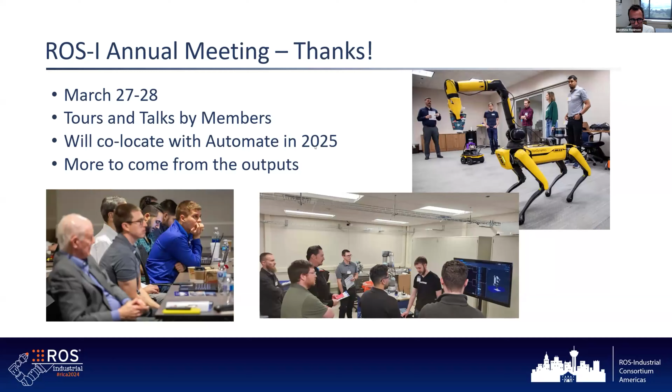As far as training and education, the big thing I wanted to highlight is we have a training event July 16th to 18th in Wichita, Kansas. This is hosted by ROS-Industrial member Spirit Aerosystems on the campus of Wichita State in collaboration with NIAR. We'll be focusing on motion planning optimization. There are still a few seats left, so if you're interested, check that training out.

Again, we allow full members to host a training event, and this helps us because then we can actually have these training events in other places besides San Antonio, which can be beneficial depending on where members are located. We're hoping to get something a little farther on the eastern side of the country in October, so stay tuned. We had some notional volunteers to host training, we're just going to iron out the details and that may come together. We'll announce it. Either way, October training, worst case, happens in San Antonio.

Fresh off the presses, I think last week we got notified that RIC Americas submitted a workshop on toolpath planning. This is largely leveraging the open source repository Noether, which has been picked up. On day zero, as they call it at ROSCON in Odense, they do workshop day. So stay tuned for this toolpath planning workshop, hosted, I think, by Michael Ripperger and someone who works with him. This follows from Michael's Reach workshop last year in New Orleans at ROSCON. We look forward to following up on that.

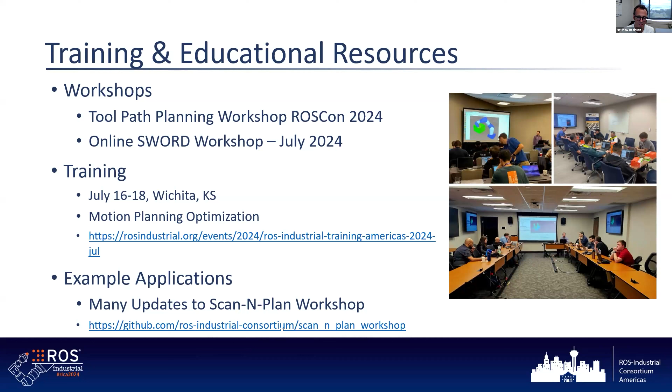And of course, Scan and Plan workshop, you'll hear a bit more about later. There's the GitHub repo, and there's been a lot of commits lately to that repository.

The big thing at a program level I wanted to share is that we've been feverishly working -- yeah, this video is going to be a little herky-jerky, we'll just pause that. Robotic Blending Milestone 5 concluded. We had a final demo on March 7th, a kind of program wrap-up at the end of March, and submitted final documents in April.

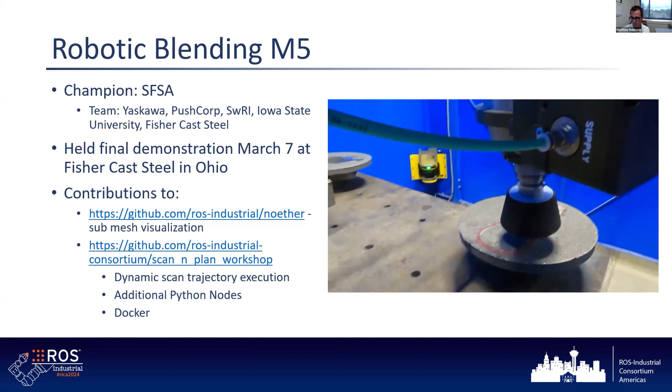But since then, there's been a lot of activity. There's been some commits and improvements to Noether, the toolpath planner that I mentioned previously, as well as Scan and Plan Workshop, which David will go into more detail about. The interesting thing about these collaboration projects is it brings together many different team members.

In this case, we had Yaskawa, PushCorp, ourselves, and of course Steel Founders' Society and their partner, Iowa State University, which they've been funding quite a bit of work with. It was really great to work with a university that has really good practical manufacturing chops, and then work with them to take what they developed and enable it to be leveraged in a modular robotics framework.

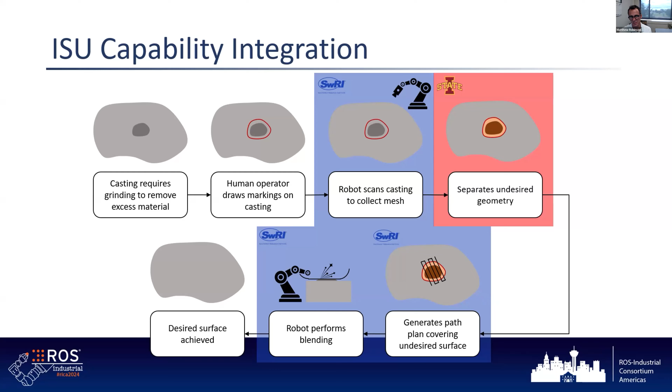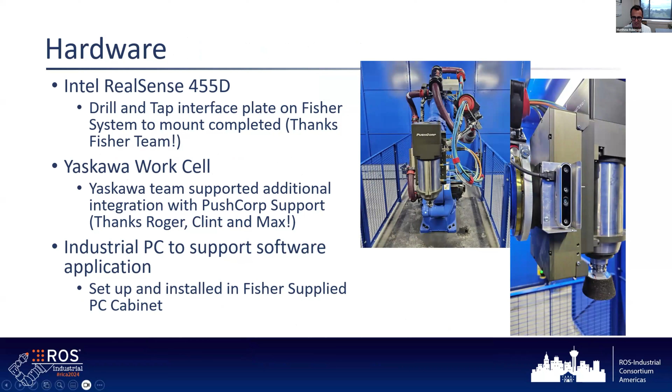In this particular application, it's leveraging the RealSense 455D. We haven't blown one up yet. You can see it's got some protection, but being a foundry, you might wonder — actually it's been going all right so far.

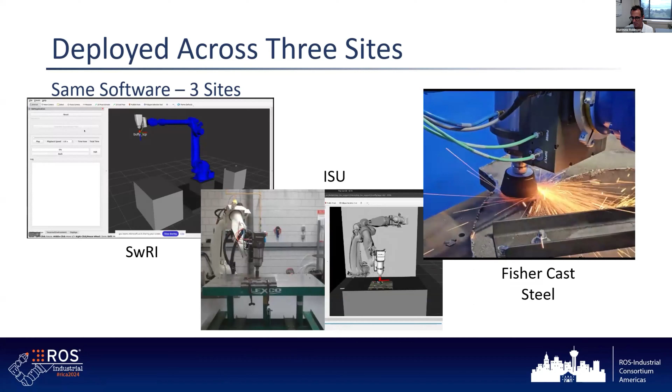And this is really useful, right? Because anyone makes commits, we basically have different hardware sets. Our PushCorp grinding system is a little bit different than what the other 2 sites have. Obviously, ISU is running a different color robot. And so it's really interesting to be able to kind of cross-test across the multiple sites. That's really interesting in these collaboration projects.

In this particular case, we stepped through, and David will probably touch on some of this. There's been a really neat update — the selecting regions, for instance, has been updated. Hopefully David will be able to touch on that, as well as some of this notion of submeshes.

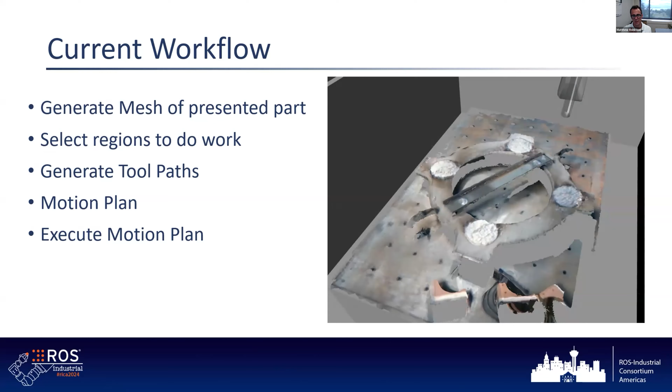As far as making sparks, we were really excited to be able to say, hey, we can mark a region. The person can see it in the scan and select that or trace over it, because we never really got the automatic segmentation working robustly. We're still helping the university iron that out.

But you can see here, we're able to basically stay within the region boundary with our other segmentation tools. So that's been really encouraging. In this implementation, you can basically draw on the mesh — the reconstruction is in Scan and Plan Workshop, so you can experiment with that yourselves.

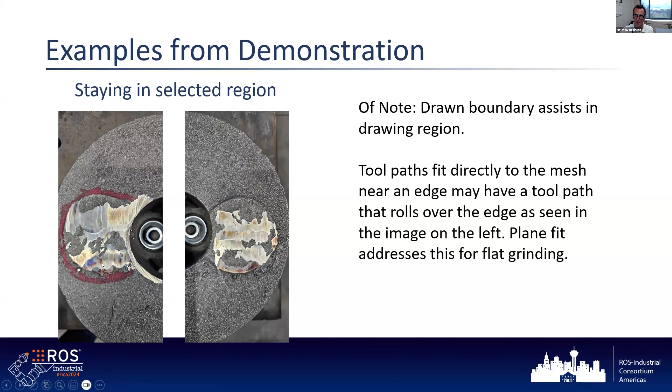It's just another video of grinding happening, right? Here you can see it's processing inside the selected boundary, which is kind of what we're shooting for in this particular case. It took a little bit of tuning, working with these particular stones.

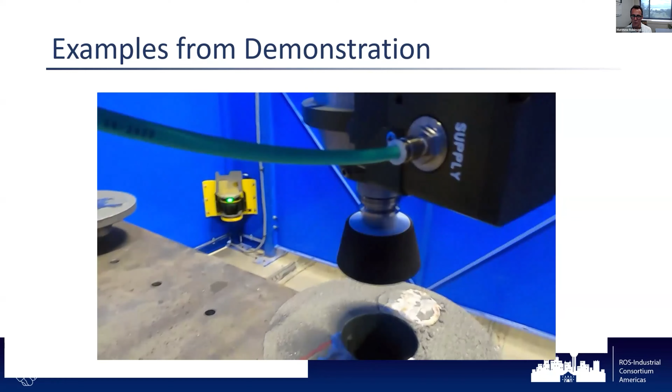Making sure, hey, I want to have a 5-degree drag — how do we ensure it stays in the boundary as I change that drag angle, or in certain cases, a push angle? The foundry is continuing to investigate angles. Making sure wherever we're contacting on that stone cup, it honors the boundary is sort of baked into the toolpath planning. So that's been pretty exciting.

So again, just shout out to the team. Here we are working in the foundry just outside of Columbus, Ohio, and West Jefferson, Ohio. Again, a cross-functional team, and we've gotten to the point where the foundry now is having operators, the actual people who do the work day to day, run the system, log improvements or problems.

And so it's been now in production since mid-April, essentially. That's a really good outcome. We'll be doing a little bit more road showing about the progress here with partner Steel Founders Society. Their research review is in July, so there'll be some more work coming out on that.

But the great news is this is the type of program that makes commitments to Scan and Plan Workshop and Noether, right? So we're getting the benefits impacting open source resources that the whole community has access to. So that's why I highlight it.

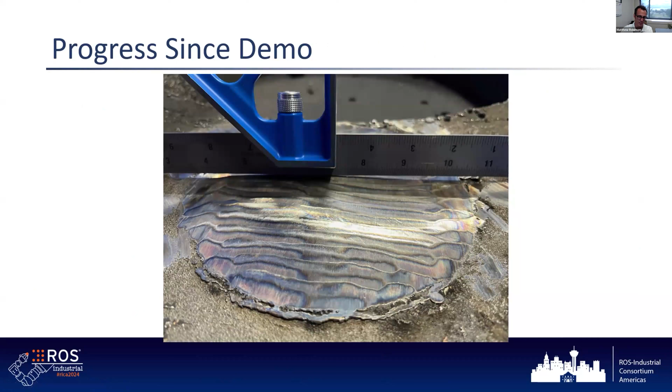And again, as we noted, they're almost at the point where they're processing these riser contacts on their castings, beating people, right? So that's what they're really excited about — the fact they're able to kind of knock these down faster than people can. This is basically them chasing where risers, where hot metal has been injected into the mold — they lop them off, and that needs to be ground flush. So that's kind of what they're shooting for and the progress they're making.

So with that said, we can get a little bit more into it with David Spielman. David, are you ready? Hopefully that wasn't too much. Hopefully I set the stage for you, man.

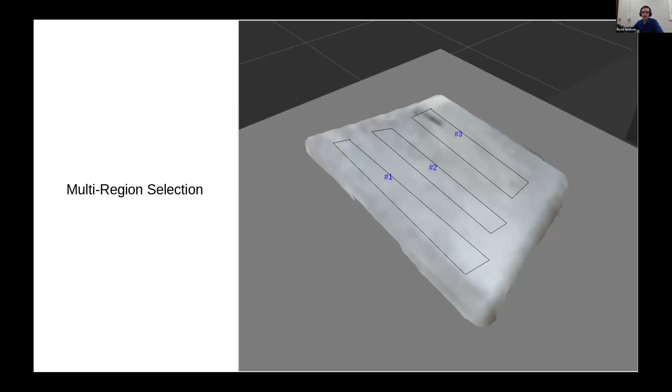This really streamlines that process. As you can see, we've added numbers to show the operator how many regions they've selected. This works similar to the current RViz polygon selection tool, except now you can select multiple regions and extract multiple submeshes.

This next slide shows multiple toolpaths generated for each of those regions. Currently we have a single raster pattern that's done on each region. We'll be updating this in the future, but for now this works. We're still doing a bit of tweaking to make sure all the toolpaths are generated properly.

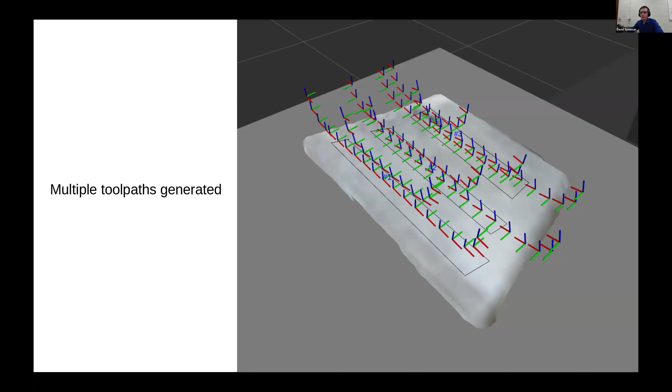Once those are generated, we can generate a motion plan. Here I'm going through a particular motion plan for these regions. You can see that once we grind off one region, we can move over to the next region in a similar way that we usually do in Scan and Plan. That's a really cool feature we just added.

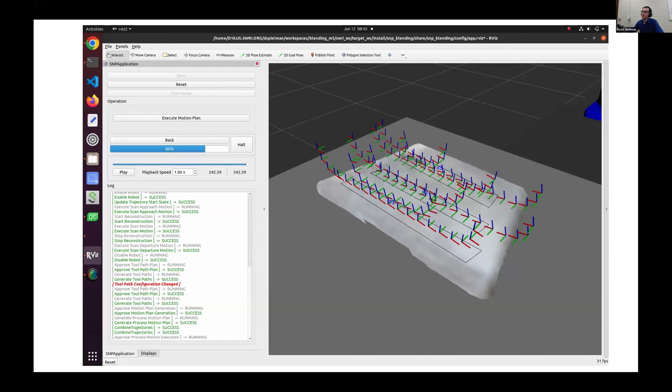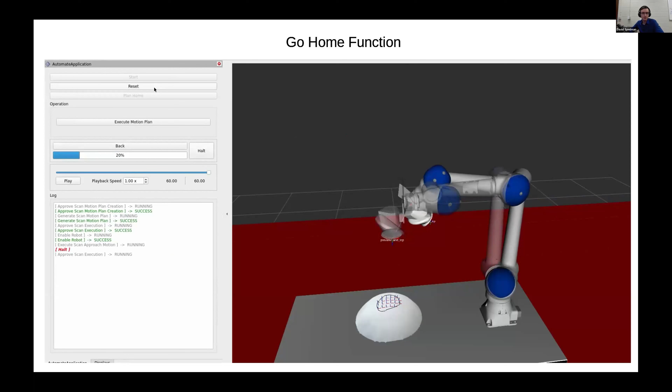So we're executing the motion plan, and we're going to halt - the robot either stops via e-stop or is halted. Then we plan home, and the robot will plan back to its starting state. This is useful in case the robot needs to be e-stopped and go to the home position, streamlining the process instead of manually jogging the robot back or asking it to go there via a job file.

What allowed us to do this is we created another service for motion plan generation to extend our current capabilities. The way we handled motion planning before this update was with one single motion planning service that would split the motion plan into 3 sections: an approach, a process, and a departure plan.

Now, in addition to that, we also have a free space plan generated from the robot's current point to another point. In the case of the plan home functionality, we're planning a free space motion from the robot's stop state to its home position, which allows us to go from the stop state to the home position fairly easily.

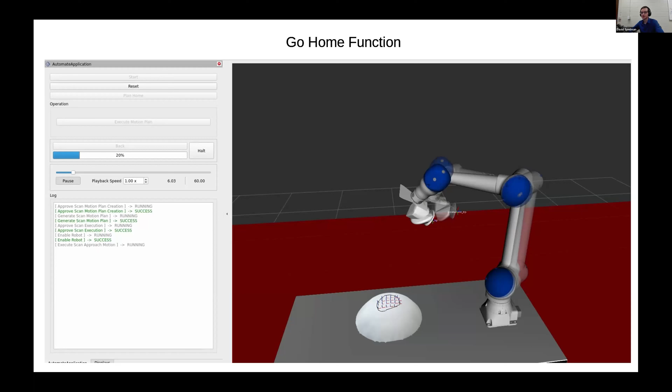Another thing we've added is behavior tree nodes that further customize motion plans. We've added functionality to let us add different planned motions to each other in order to create more complex motions. This is really useful for repeating motion plans.

One of the interesting things we wanted to handle with the Blending M5 project was repeating motion plans. Previously, we'd select a region of interest, grind it, and after grinding the robot moves back to its home position. We wanted to instead, after the departure plan, go back to the start of the motion and repeat that process over and over. After a certain number of passes specified in our GUI, we'd go back to the home position. These behavior tree nodes allowed us to do that.

In addition, with MultiRegion Selection, we're able to repeat multiple passes on multiple regions within the part in one go, as opposed to doing it manually over and over again.

In terms of administrative improvements to the repository, we've added package versions and release versions to Scan and Plan to make it easier to track changes. Additionally, we've added change logs that will allow our members and any visitors to the repository to see what updates we've made to Scan and Plan.